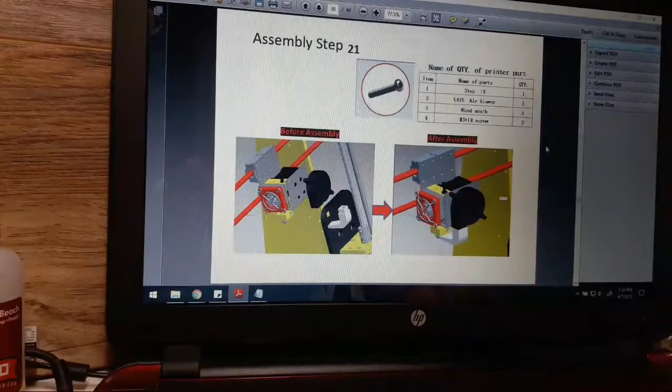Let me get to the instructions here real quick. So there's a PDF. Pardon the crappy camera work, I don't have the camera on a stand, but these are the instructions that I'm dealing with. There's not much as far as dialogue as to what goes where, how to assemble things. It's just kind of like, here, grab this, do this, add that.

As a matter of fact, when I was putting in the belt, that's the only instruction I was given there: 'Attention belt.' Basically, a little warning as to how much belt came in the kit.

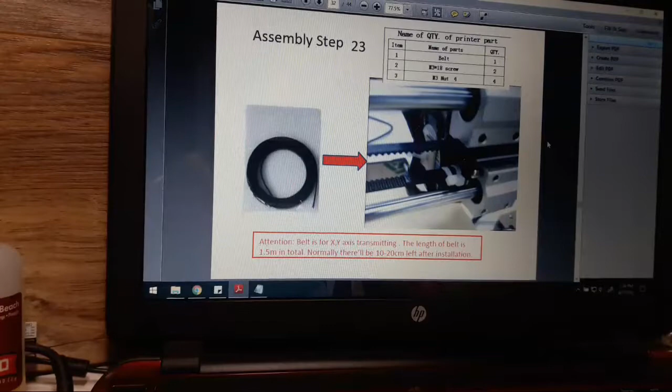As I go through, there's a couple things here and there, but like for instance, this is the assembly for the fan on the extruder. No instructions - before assembly, after assembly, and put that together. So the instructions are very rudimentary, they're based on images and stuff like that.

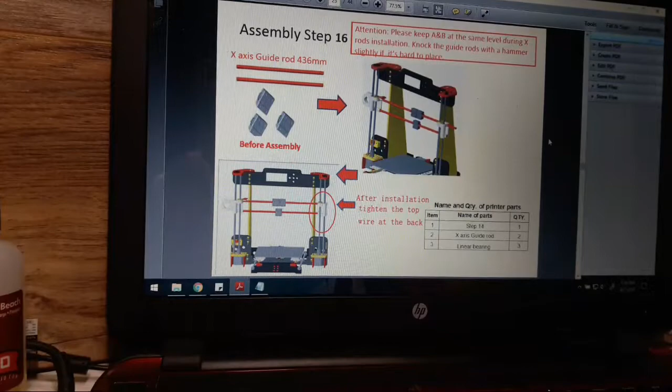Very, very difficult to follow because there's no real written instructions. I would have preferred step one, add this to that, and it should look like this - a little bit better instructions. But being that the printer comes from China, there's a language barrier, and so of course you're going to run into those kinds of issues.

Come here, that's payback for every time you go to the drive-thru and do that in the back, and I do that and ruin your order. So that was my lovely wife, she wanted to tease me a little bit on the live stream, and she succeeded. She did a good job.

But yeah, if anything, the printer is extremely easy to build. There's not much to it. Very easy to understand, even if it's the first time you build something, even if it's the first time you're dealing with 3D printers or anything like that. It's very straightforward, all the pieces fit a certain way, but the instructions is what's really dicey.

And of course, I've heard a lot of people talking about that in certain communities. I've seen a lot of videos where it's like, okay, this is horrible instructions. Steps bounce around from all over the place, especially this part that I'm about to show you here.

So this right here is the belt assembly for the X axis, and inside here this is the carriage for the extruder. So they tell you, put the fan in, do all of this stuff, put the extruder inside here, and when you're done with that, add these two screws for the belt.

Well, in order to do that - I want to see if it'll focus a little bit, but it's picking up my artwork in the back - but basically, to put in those two screws, you have to take the extruder out.

So it's a lot of that sort of stuff happening. Like you assemble something, you think you can move on to the next step, and then when you get to that step, you have to undo what you previously did, and then add that step, and then go back and add that sort of stuff. So that's the kind of things that I'm dealing with.

If I went with a different set of instructions, I'm pretty sure the build would go a lot faster. I am taking my time, seeing how everything's going to be routed as far as cables go, but we're close to the point where we could start putting in the electronics and start wiring the power supply and all that good stuff. And like I mentioned, I do have a different power supply, I do have MOSFETs, I do have additional parts that I can start doing modifications to this particular printer.

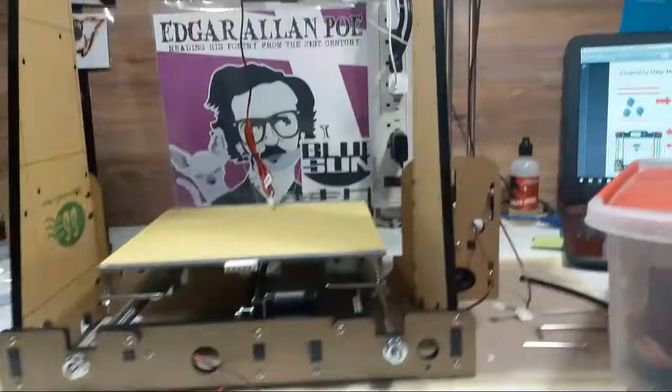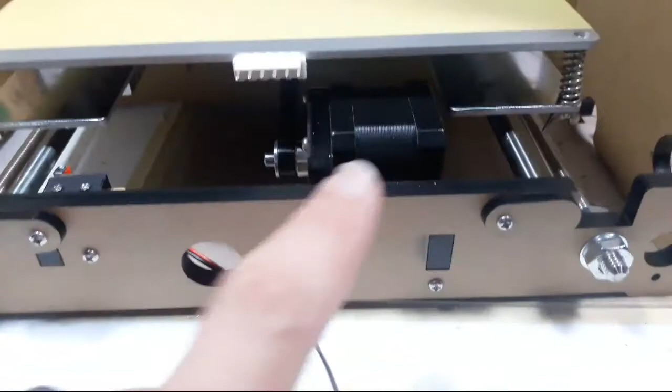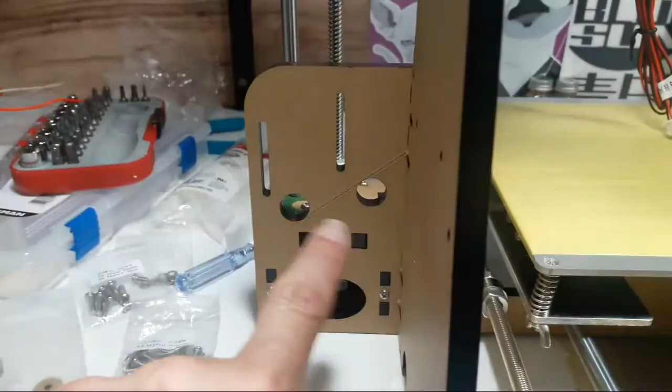Like I said, 4 hours got me to this point right here. Of course we have the hotbed installed the way it's instructed. I did not remove this and solder directly onto the bed. There's the motor for the bed, some wire management holes in the printer, and here is where the LCD screen is going to go.

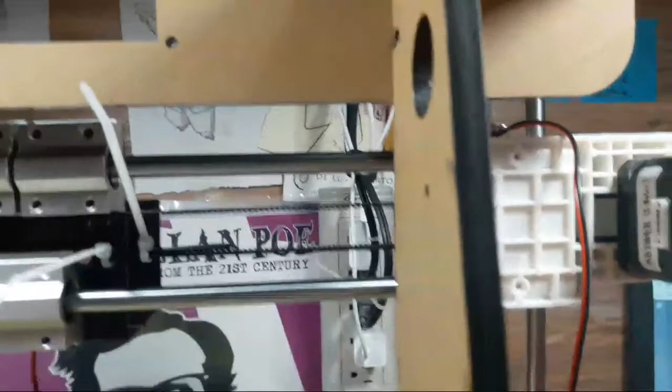So there's a couple of things here and there. In order to get this belt to run properly through this motor, I had to flip the motor head the other way around, and that stopped the belt from twisting up. As you can see, there's zero tension as opposed to this one, which has a lot of tension. This one does not, so I had to add these zip ties to set up this crazy system. I know there's a mod for that which I'll be printing out as well.

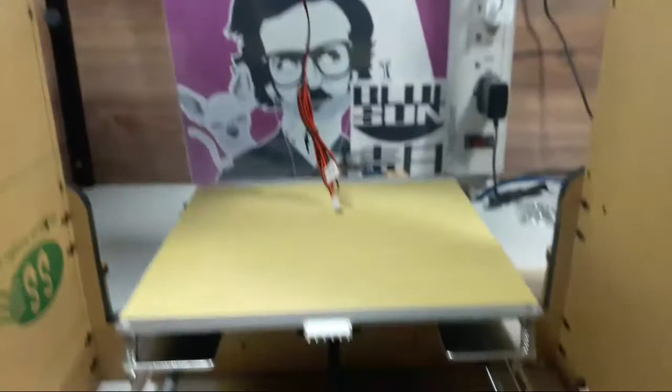But we're pretty much there, pretty much at the point where we're going to start putting in the electronics and see how this baby goes. So I'm going to go ahead and set this back up on my tripod so we can continue doing that, and so far you've had an aerial view.

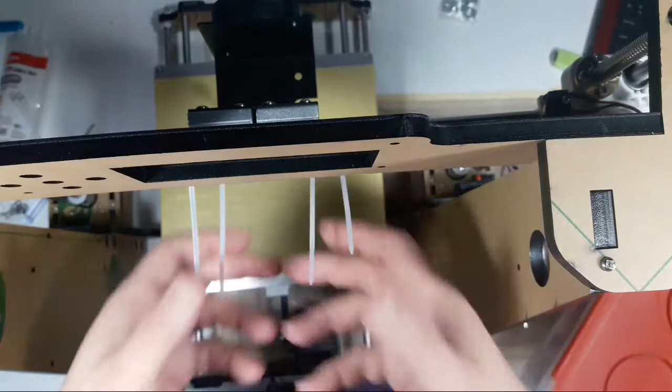Unfortunately, just due to the spaces that I have, that's what we've got to deal with for the moment. I know that when I took a break, some of the first video disappeared or something - I don't know, but something happened to the first half.

But we're gonna keep going, and of course once it's assembled I'm gonna do a better video explaining everything that's going on. But I just wanted to take a little break, and then move forward from there.

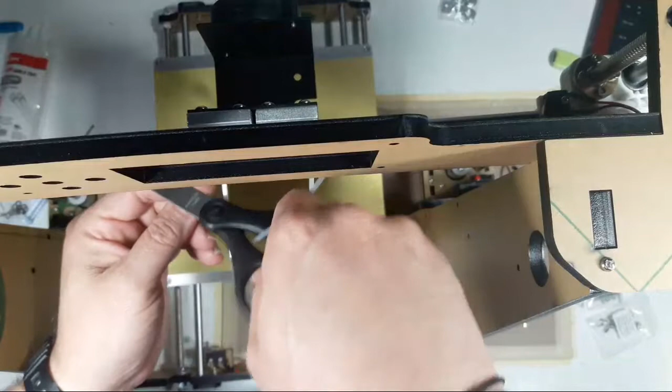So what I'm doing now is I'm just removing the excess pieces of zip ties very carefully, not to damage any components as I do it. And then of course we're going to keep going with the build, continue on with the build.

This is all going to be changed out later on. I'm going to do a different system because I'm not entirely happy with that at all. But it is what it is, it's a cheap printer, and that's what you're dealing with.

Overall, I'm not... just getting a couple cutting blades here. Overall, I'm not upset, not upset at all. Could things be better? Sure.

And I think that's the reason why there's so much support in the forums with this particular printer, because I mean it is cheap. You could do a lot of modifications to it, all kinds of stuff to this printer, and so on and so forth.

So I'm taking my chances, I'm gonna see how it goes. So far so good. Like I said, my only complaint is of course the instructions. So all right, moving on.

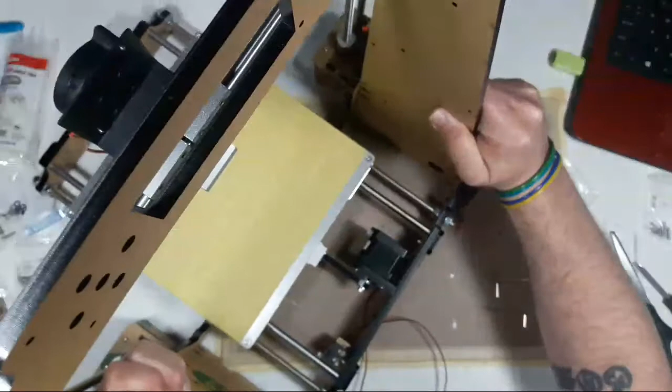So one of the things I wanted to do was to work on the extruder. Now I'm starting to experience the weight of the printer.

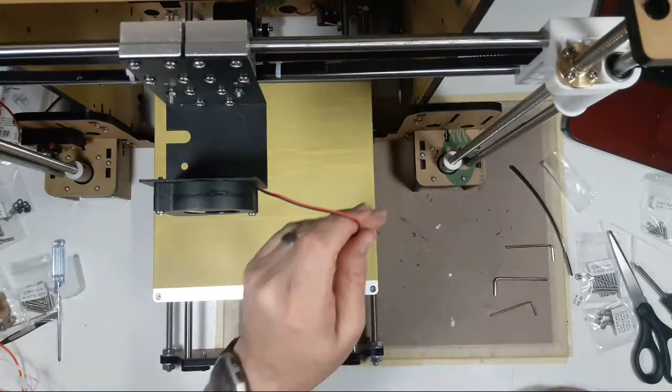Alright, so the extruder cables are going this way. There's a little fan or blower right here. This is the extruder, and they had me add this little fan and heatsink, but it's kind of loose and hokey, and I'm not too thrilled about that.

But I think I want to run this cable a different way. Maybe I don't have to - maybe I could just hide it inside this housing here. But I'm going to go ahead and put this back in. I was going to turn the orientation of the fan, but I'll leave it as is for now. I just think it'll get in the way of that extruder, but we'll see. So this is going back in, and hopefully I'll have room.

Yeah, see? Okay, so I do want to change that. Let's change that, why not? So there's certain things you have to do—you have to take certain liberties when it comes to this build to kind of make things happen.

I don't know if these are the original screws from the bottom, or if they go here, or if it's going to make a difference. I don't know if I'm screwing this up by having this here, but I really don't like the way that just kind of hangs there like that. It seems a bit strange to me.

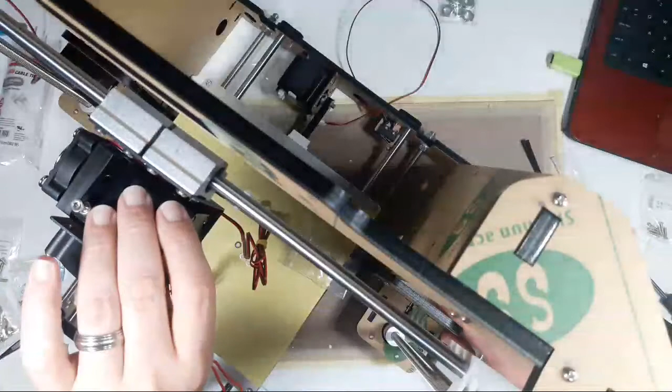But this now has to go in, and it gets attached with this right here. And another thing that's odd is that there's just this one screw here, so this whole housing just kind of moves around—or this particular piece just kind of moves around in there.

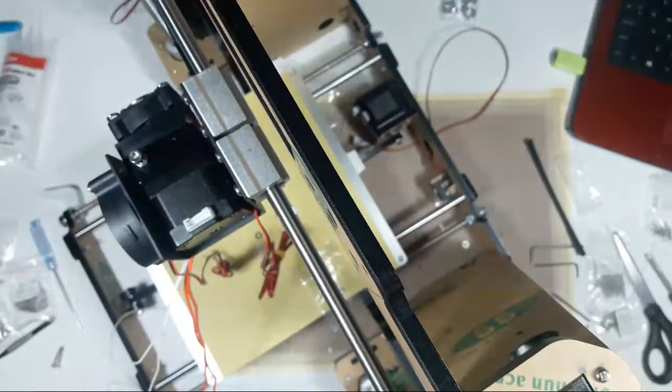I could see where right there the belt screw is kind of messing with this, so I'm going to pull it back a little bit.

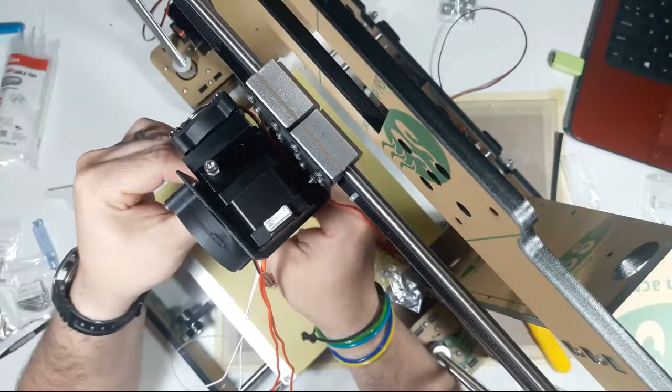Alright, that's a different size screw. Okay, so I see what's happening. I need to take this out for a minute and change that screw out because it's slightly longer M3. So it's just things like this that I've been running into that have slowed down the process a bit. But I'm afraid that if I don't take care of these things now, they're gonna become gremlins later on, so I'd rather take care of it now. We'll take that out, take the extruder out again. Yeah, okay, I can see where the problem is right there. This screw is way long, so we're gonna replace this one.

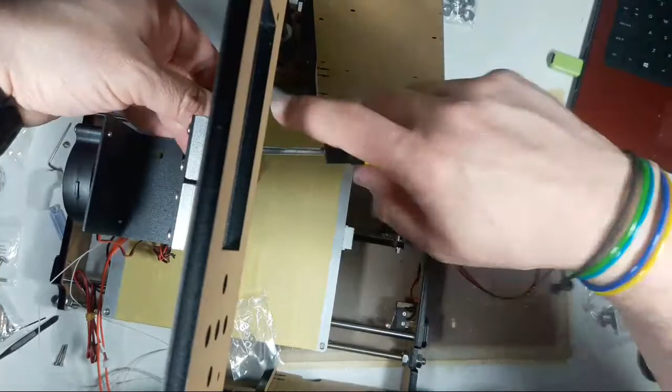Alright, and it's going back in. Stand up for this operation. Alright, that's a lot better. That's going to stop it, that's going to help with the assembly of the extruder there. Okay, so interesting enough, I just gotta pull it back some. Pull it back. So it's a lot of little adjustments like this that need to happen to get all this running right.

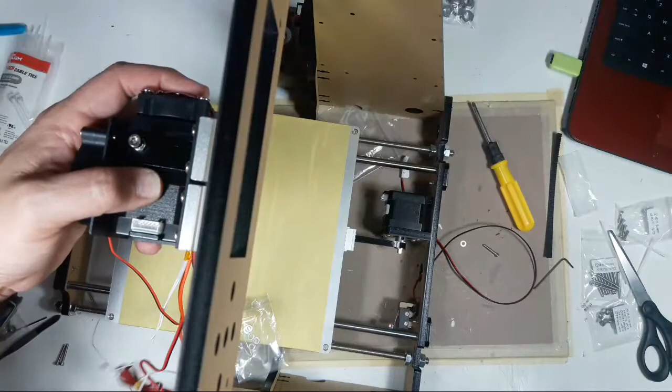Alright, cool, back to this piece. Alright, it's fitting nice and snug there. Let me put this one back. Okay, that one's all good there. But I do notice that it's sliding back and forth, kind of moving this way. Don't know how I feel about that, but we'll have to go with it for now.

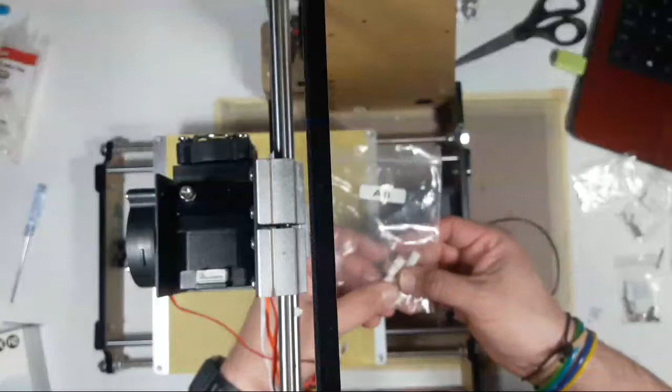Okay, it looks like it's going to require these right here. So there should be 4, the filler washer, which is M3x7. There should be 4 of those. So it's 1, 2, 3, and 4, which are there. And let's go for it. So in the unboxing, of course, I showed this. We're gonna open it.

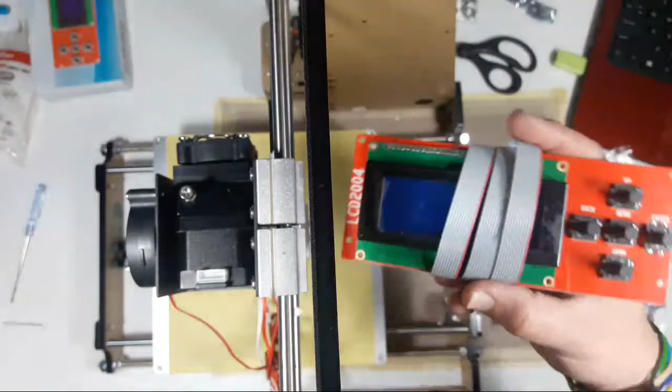And there she is. Alright. So it's kind of indicating that the spacers are going to go right in there, along with the M3 screws. So let's see. The M3x30s are kind of long for this, which is kind of weird. It's a really long screw for that particular build. Okay, so the piece they did not tell me about is this one here, which goes in the back to protect this.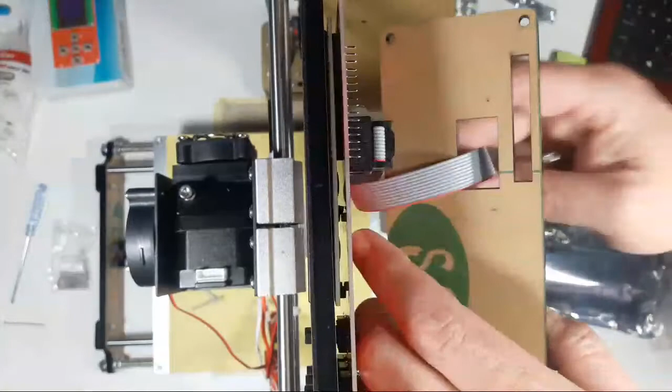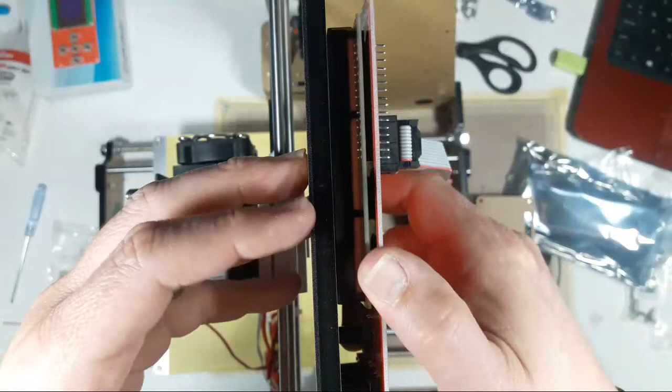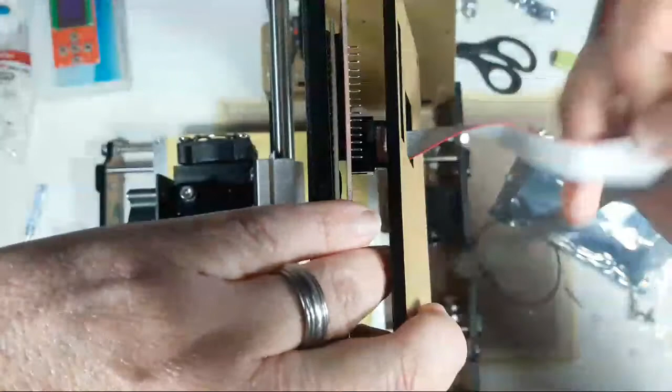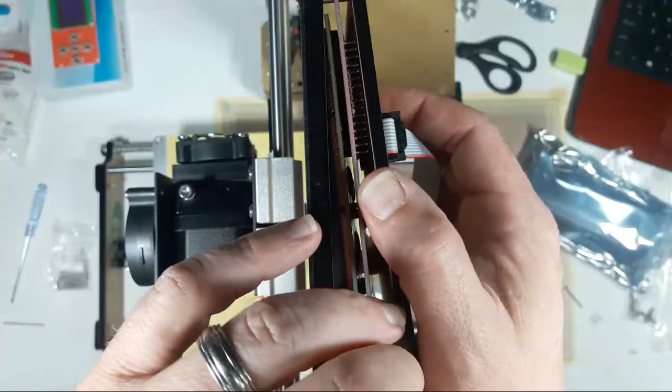So I'm guessing the spacers go in between these two pieces here. Alright. And the ribbon cable is getting a little tricky. Alright. Okay, let's go ahead and put the second one in. Alright, simplify things. One pin.

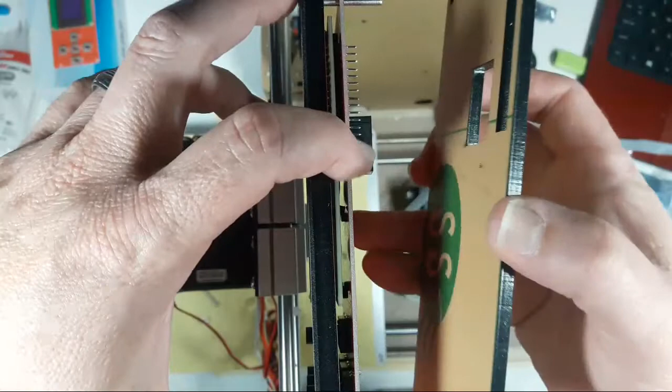So it's asking for 4 of these. Okay, those are the ones that fit there. The instructions don't really indicate where the spacers go, so I'm assuming it goes in between that. So let's take a look and see. I'm guessing it goes something like that. We'll have to see if in time I am correct. Alright, so we have that. Let's see, spacer here. And the last screw.

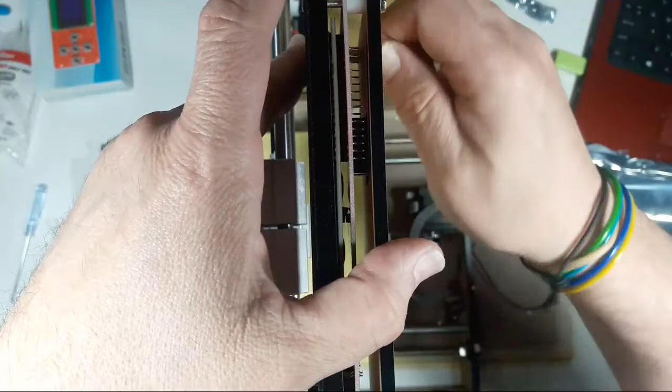Alright. If I tighten this up anymore, it starts bending, it starts bending that chip, so I don't want to do that. So I wonder if perhaps the spacers go here. So I'm going to go ahead and undo this and try that, to where the screen will be a little bit recessed, but at least it's not bending that chip. So I think I have the spacer in the wrong location.

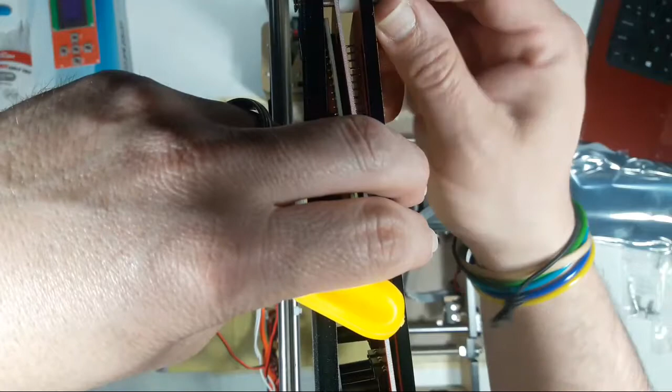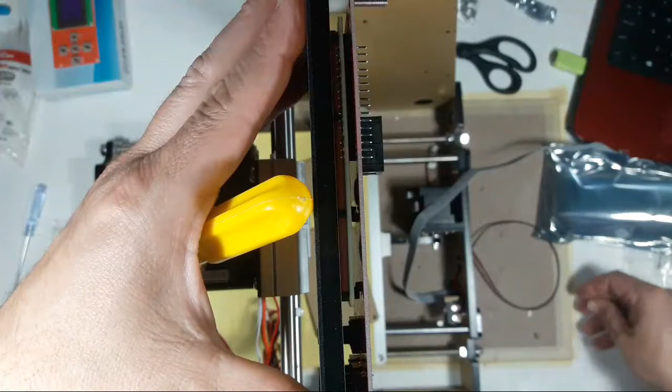Again, the instructions do not indicate where those spacers go, but I'm assuming that's where they go. It just makes more sense that way. An M3x30 screw is also very large back here, but I guess that's okay.

Yeah, that's a lot better. I feel a lot better with that. Yeah.

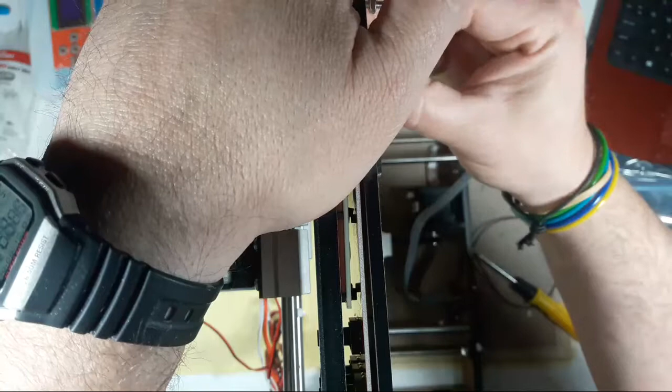All right, and there's the last one. Okay, now I could bring this guy back. Cable ribbon. And we could tighten these up.

All right, cool. So next step is power. Let's take a look at that.

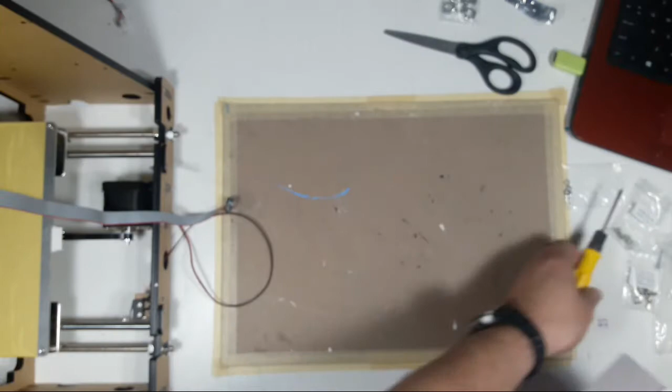The instructions are a little bit odd, which is a little bit concerning to me, considering that we're working with power. There's the power supply. Of course, there's no fan.

But what's concerning to me is that the instructions say, attention, this is the wiring diagram of the power supply. 1, 2, 3 separately represent the line of fire. So here's our cables.

And I'm going to go ahead and follow the diagram for that. A little bit nervous, just a little bit. So you have brown, yellow, and blue.

And we're going to go ahead and wire that in now. So brown is first. Brown goes on 1, 2, and 3, and that's pretty much all you get right there.

I don't know how that's going to work. We'll go with it as default. I would have loved to have some kind of connector here. So we're just going to go with it, see what happens.

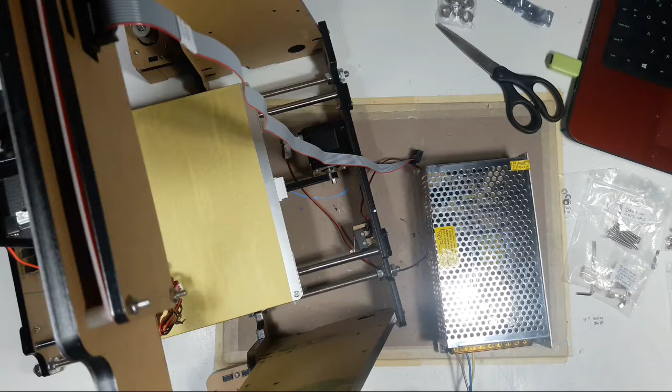And it should go attached to the side. It's saying it goes attached to here.

I just don't see it. Oh, okay, alright. So maybe, oh okay, so they screw in by the back. Got it. Alright, so let's turn this.

I was wondering how we would attach these. Alright.

There's one. There should be two other ones. Let me make sure. Let me make sure where these are. Okay, these don't line up.

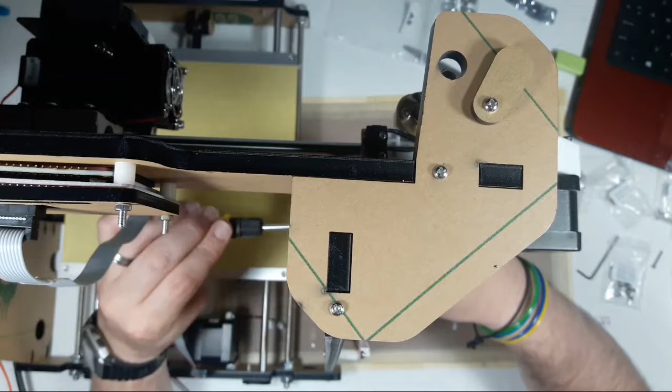Alright, there's the motherboard. And of course, now it is talking about wiring. Please connect the electronic wires to each component correspondingly.

Okay, so let's see. It seems to think we're confident enough to do this. All right, let's see. So we have LCD screen.

Kind of hiding everything behind the board, but I'm going to run into problems there. So let's go out this way.

All right, and then we can hide that back here. Perhaps snake it a little bit more. And of course, cable management is all up to you, how you want to do it. For right now, I'm kind of letting it sit where it does.

Okay, then we have, don't know what these are. There's E and T. I'm guessing go here. Is that right? Yeah, extruder thermistor. Okay, so there's the thermistor. And I don't know what these orange cables are just yet.

This is Z2. Alright, we'll go with that. Z2 fell out.